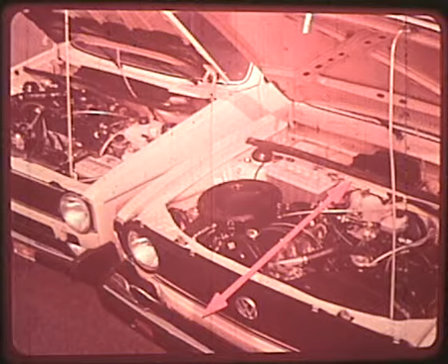The most obvious change from the Dasher and most other cars is the engine is mounted sideways. The conventional method of mounting inline and V-type engines with the crankshaft aligned fore and aft, as shown here in the Dasher, is not really necessary or important with front-wheel drive. The transverse Scirocco and Rabbit engine transmission arrangement for both manual and automatic transmission cars makes for a more efficient use of the engine compartment space and improved access to components.

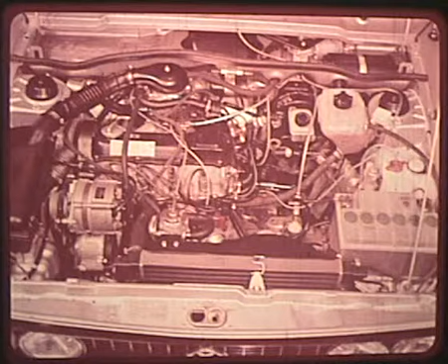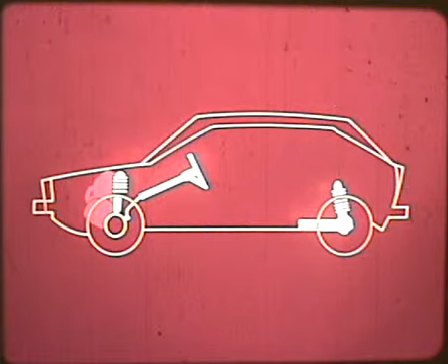It allows a shorter engine compartment than in the Dasher, and it means the transmission and drivetrain is also different from the Dasher, although the engine is the same. We'll come back to the engine compartment later, but first, let's get a more general idea of what we have in these two cars. The Scirocco was designed as a sporty car, while the Rabbit is more of a family car and can accommodate up to 5 people. Mechanically, both cars are practically identical. The differences are in the body styles and interior configurations.

The front bucket seats in both cars are in the Volkswagen tradition, designed by orthopedic experts to give solid comfort to driver and passenger. They are individually adjustable front to back, as is the angle of the backrest. The car is built for comfort, even luxury in driving.

The instrument panel, for instance, has been carefully designed so the quickest glance will give the driver the information he needs. The Scirocco dash features a full speedometer-sized tachometer in the sports car tradition, and a resettable odometer is included in the speedometer housing. A voltmeter and a quartz clock are included in the center console. On the Rabbit, the tachometer is replaced by a speedometer-sized quartz clock.

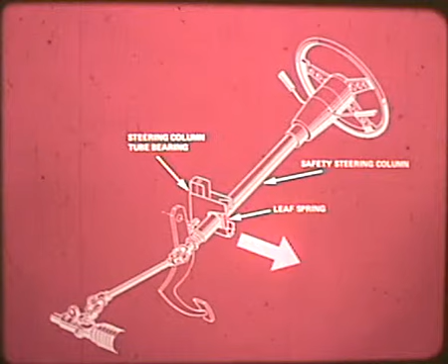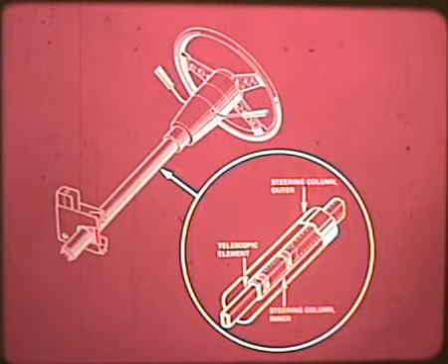Safety is built into these cars in many ways. Take the steering column. In case of a front impact in a car equipped with manual transmission, the leaf spring shown in red will give way and the column swings to the side. In automatic transmission cars, the steering column is additionally equipped with a telescoping element. After the column swings out to the side, it also telescopes.

The Scirocco and the standard Rabbit have a 3-point safety belt, but some of the Rabbits have an optional automatic seat belt. It is fastened at one end to the door so that when the door is closed, it covers the chest without a special hookup. This is Volkswagen's new passive restraint system. Again, on the Rabbit only, as part of the passive restraint system, a special knee bar prevents the front seat passenger or driver from sliding forward in case of front-end impact. This feature takes the place of the airbag, which some manufacturers offer as a high-cost option.

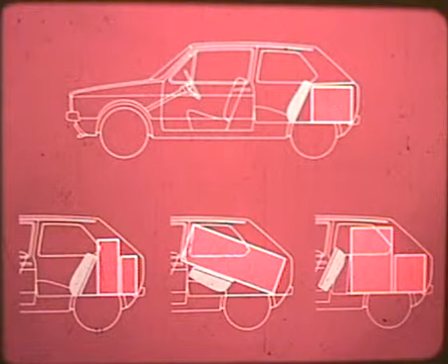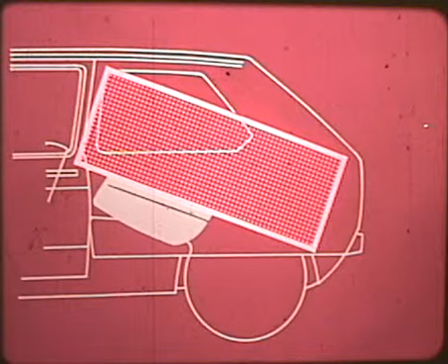The Rabbit luggage compartment deserves special attention. It is roomy to begin with and is expandable in several different ways, as these drawings show. With the rear seat in its normal position, there is as much room as many larger cars have, 12.4 cubic feet. The rear seat backrest can be folded forward over the rear seat cushion to allow large luggage to be carried. Even larger luggage can be carried by upending the seat cushion with the backrest folded forward.

So far, we've talked about the features of the new cars from the customer's viewpoint. One thing that no words or pictures can tell you is the excellent riding comfort, superb handling, and nimble response of both the Scirocco and Rabbit. These characteristics you have to experience yourself by driving the cars.

Now that we've had an overall view of the Rabbit and Scirocco, let's talk about how the cars were designed from start to finish with easy serviceability in mind. A case in point is that service intervals have been extended. Maintenance is required only every 15,000 miles, with an oil change every 5,000 miles. This means that the pre-delivery service and 1,000-mile checkup are more important than ever.

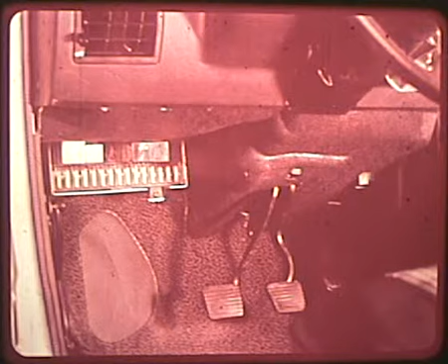Here are the main features that are new with the Scirocco and Rabbit. We said before that the electrical system was similar to the Dasher. However, the fuse and relay board is located under the dash to the left of the steering wheel. Fuses and relays are easily accessible for replacement.

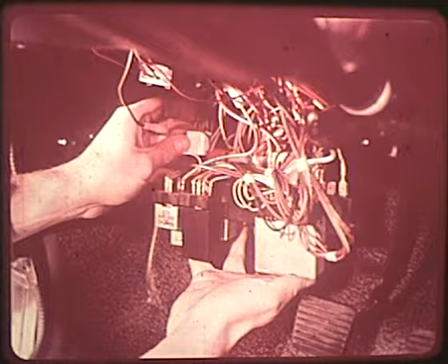The wiring harnesses terminate in plugs, which fit into the rear of the fuse board. Each plug is keyed so it cannot be inserted in the wrong socket. From the back of this board, with the help of the wiring diagram, it is a simple matter to trace many of the electrical circuits in the car.

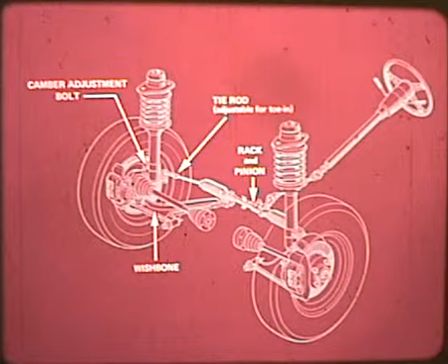The front suspension features McPherson strut and rack and pinion steering. Toe-in is adjusted on the right-hand tie rod only, and the suspension strut is bolted to the wheel bearing housing for easy replacement. To adjust camber, loosen both suspension strut bolts, then turn the upper attachment bolt, which is eccentric, until the required camber is obtained. Tighten nuts and check camber again to assure it's right. If necessary, readjust.

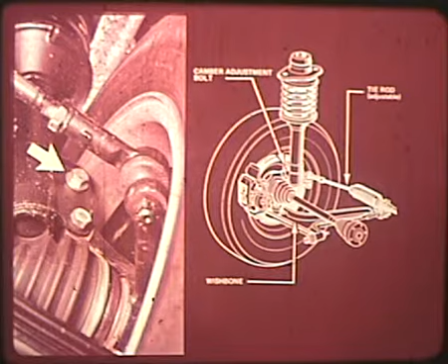The rear suspension is really different. It's called an independent stabilizer axle. Its main elements are a steel torsion beam, indicated by the green arrow, and welded-on trailing arms. This is a surprisingly simple but very effective independent wheel suspension system. When only one wheel hits a bump, the torsion bar can twist as much as necessary to absorb the deflection, while the other wheel stays firmly on the ground. The suspension struts are integral units, combining coil springs and shock absorbers, and are bolted to the body.

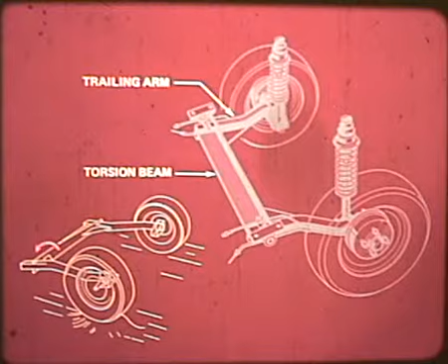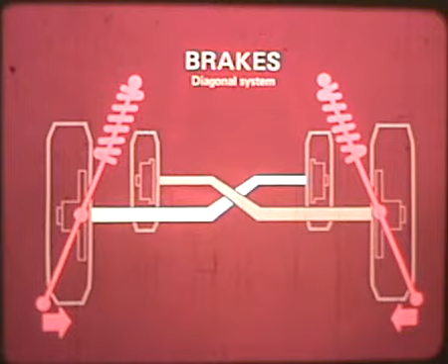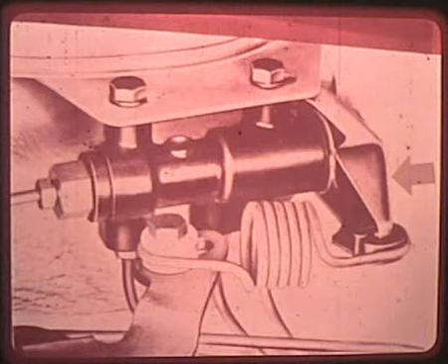As in the Dasher, the braking system is dual diagonal. Right front and left rear are on one system, and the other two are on another system. If one system fails, the car can be brought to a straight line stop with the help of its negative roll radius. Drum brake adjustment is made the same as on all other Volkswagens. On cars equipped with brake pressure regulators, refer to the repair manual for procedure to relieve hydraulic pressure if the rear wheels do not turn freely with shoes backed off.

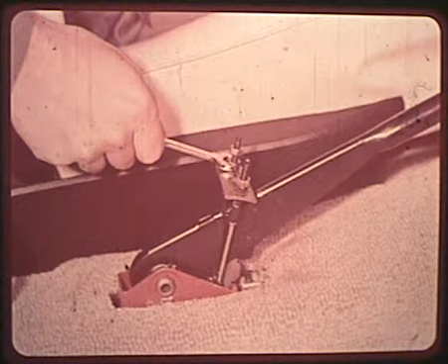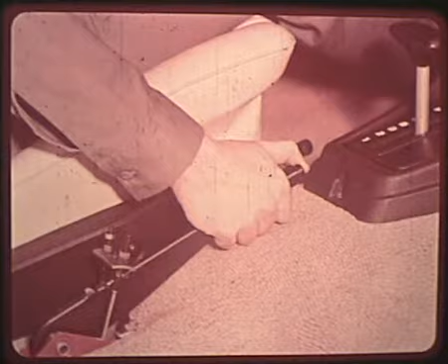The parking brake is adjusted from inside the car. Each rear wheel is adjusted separately. First, loosen the lock nut on one parking brake cable and pull the lever to the second tooth. Then, tighten the adjusting nut until the affected rear wheel can hardly be turned by hand. Release the brake lever and make sure the wheel can turn freely before tightening the lock nut. Repeat the process to adjust the other rear wheel.

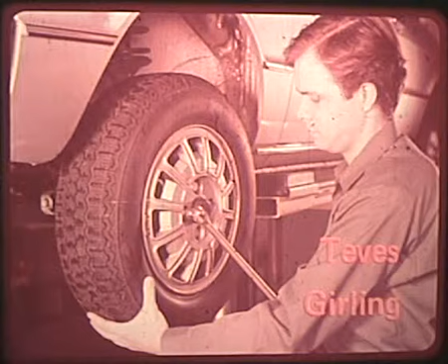Of course, the front wheels have disc brakes, but the calipers could be either of two designs, Teves or Girling. Either way, they have a unique wear signal that should appeal to customer and servicemen alike. Here's how it works. There is a 2mm high spot on the disc, as shown in yellow, which does not contact the pads until they are worn to the point where they need replacing. When the inside part of the pad contacts the high spot, rotation of the wheel will cause pulsating action, which is transmitted to the brake pedal. The driver can feel this bumping action when his foot is on the brake pedal.

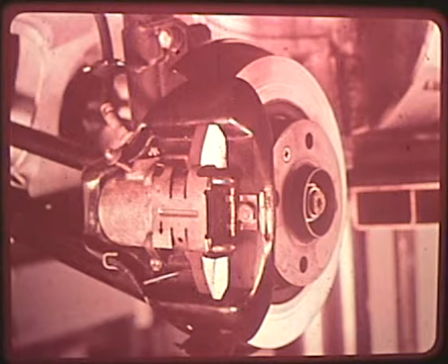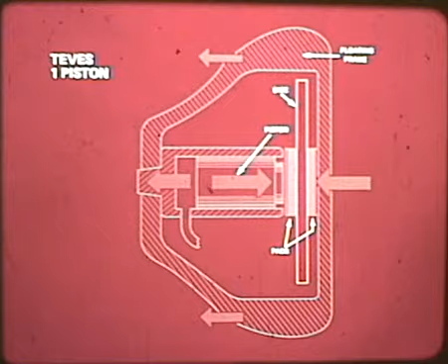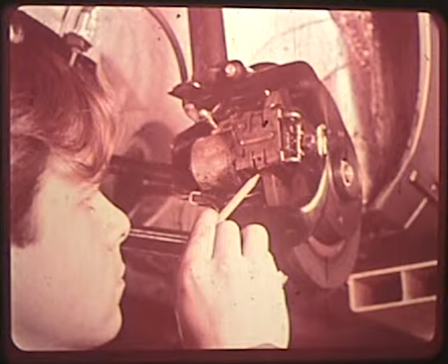As we mentioned, some Rabbits and Sciroccos will be equipped with the new Girling caliper. So, we'll show how these calipers operate and how the pads are changed. First of all, most floating calipers are of the single piston design. In the Girling system, two pistons are used. One to apply pressure to one pad, while the other applies pressure to the floating frame or yoke, which in turn forces the opposite pad against the disc. You can check for wear of the pads visually, but this should not be necessary because the driver will be aware of the need for brake pad replacement if the brake pedal pulsates when the brakes are applied.

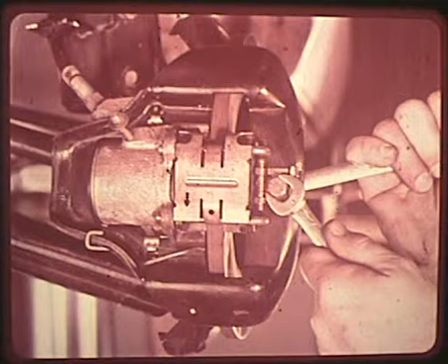Should you have to replace the pads, remove the wheel, then take out the bolt that holds the retaining pin assembly. With pliers, pull out the pin assembly. The spreader spring will fall off when this is done. Now, replace the pads. After reinstalling the pin assembly and retaining bolt, replace the spreader spring with the arrow down. Then put the wheel back on and you're done.

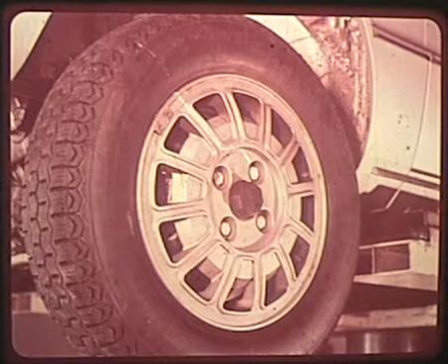With front wheel drive, you don't have to adjust front wheel bearings. But rear wheel bearings can and should be adjusted whenever necessary. Wheel bearing clearance is correct when the thrust washer can be moved with only a slight pressure on the screwdriver. After adjusting, secure the assembly with the lock nut and a new cotter pin.

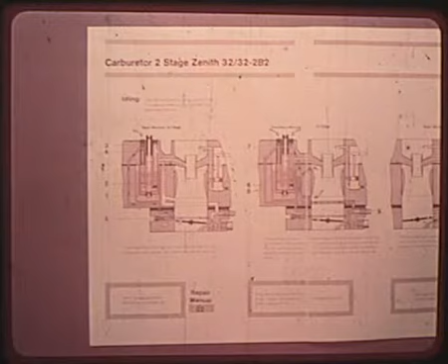As mentioned earlier, the engine in the Rabbit and Scirocco is the same as the Dasher, 1500 cc, developing 70 horsepower at 5,800 RPM. Bore, stroke, and compression ratio are all identical. Featured on the engine is a new two-stage Zenith carburetor. Its operation is fully explained in the introductory service booklet.

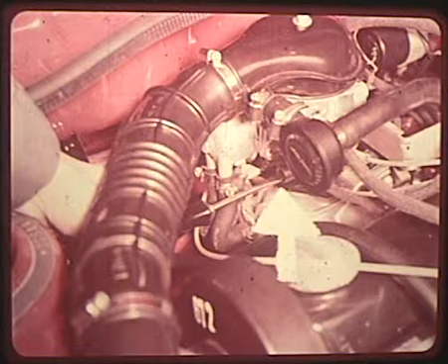Normally, only two carburetor adjustments are necessary. The first adjustment is idle speed, set to between 900 and 1,000 RPM with the idle adjusting screw indicated by the arrow. Turning it to the left speeds up the engine, and to the right slows the engine down.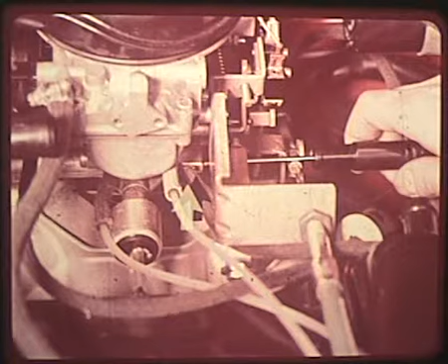Next, CO is adjusted by inserting the probe ahead of the catalytic converter by removing the cap on the EGR filter housing. Then, disconnect the air pump and adjust the carburetor mixture screw, as shown, until a CO value of 1.5 to 2.5% is obtained.

This brings up the subject of emission controls. Full details of the devices on these two cars will be found in the booklet 1975 Fuel and Emission Devices, but we'll mention them briefly. We basically have three devices to control hydrocarbon and CO emissions and exhaust gas recirculation to reduce emissions of oxides of nitrogen. Let's look first at secondary air injection.

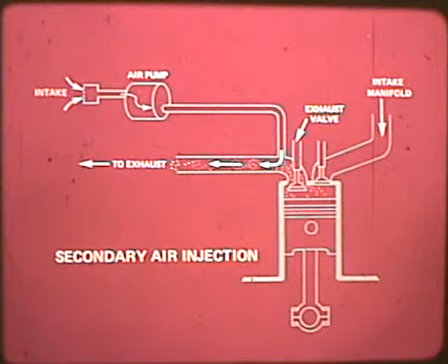Emissions of hydrocarbons and carbon monoxide are reduced by using an air pump by which fresh air is pumped into the exhaust manifold. The extra oxygen in the air allows the escaping hydrocarbons to continue burning, thus reducing their content at the tailpipe. With exhaust gas recirculation, some of the exhaust is fed back into the intake manifold. As a result, combustion chamber temperatures are lowered, thereby reducing the formation of oxides of nitrogen.

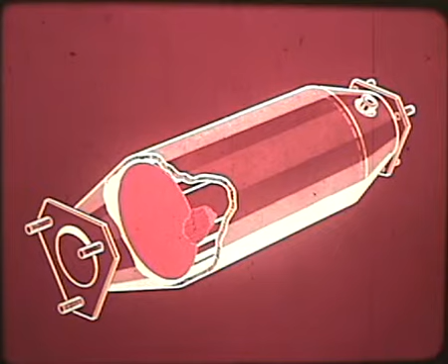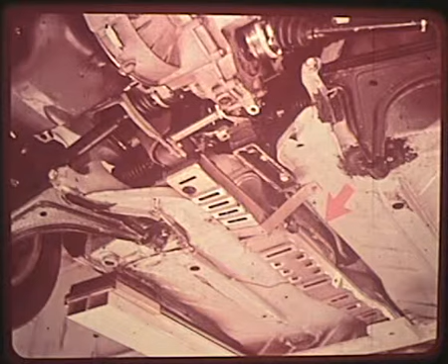The catalytic converter takes the HC and CO-laden exhaust and, in effect, cleans it up after it leaves the engine. The catalyst inside the converter triggers a chemical reaction which converts the undesired emission to harmless water vapor and carbon dioxide. For the catalytic converter to perform its function, it must operate at a very high inside temperature, over 1600 degrees Fahrenheit, so it is insulated from above and below.

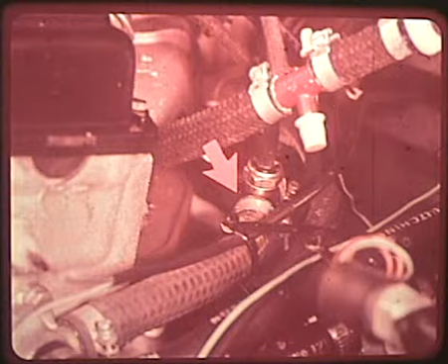To bring the converter into operation as quickly as possible, a temperature-controlled ignition advance valve remains closed when the coolant temperature is below 136 degrees Fahrenheit. This results in retarded ignition timing. When the temperature exceeds 136 degrees, the valve opens, allowing the ignition to advance.

As you know, cars equipped with catalytic converters must use unleaded fuel. Only the special nozzle on the unleaded fuel pump will fit the filler opening on these cars. If as little as 2 tankfuls of leaded fuel is used, the catalytic converter's effectiveness will be reduced by at least 75%. Here we see a close-up of the catalytic converter with the lower heat shield removed. When replacement is necessary, the entire converter is replaced.

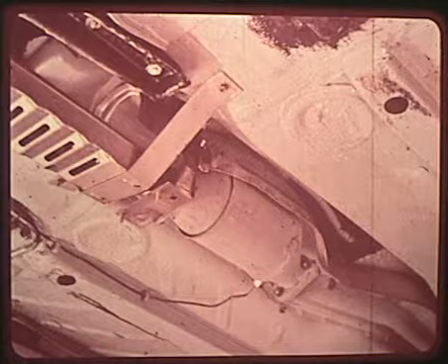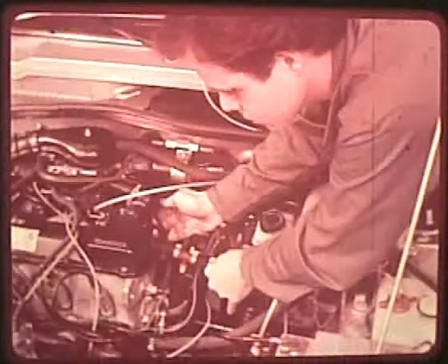Earlier, you may have noticed the 2 warning lights on the dash. The one for exhaust gas recirculation, marked EGR, will light up after 15,000 miles, indicating a need for servicing. This includes visually inspecting the EGR system for leaks or damage, and then resetting the elapsed mileage odometer so that the EGR light goes off and the mechanism begins counting mileage again from 0.

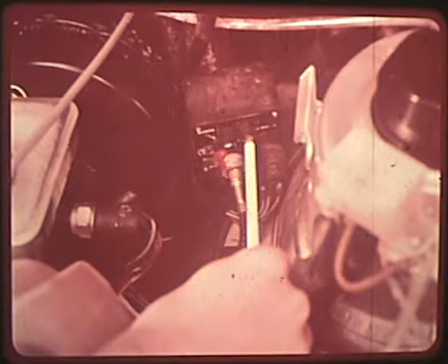The CAT light button is reset in the same manner after the catalytic converter has been replaced. The CAT light will go on at 30,000 miles, indicating it is time to replace the catalytic converter. Should this light flash on and off at any time, it means the converter is overheating and the cause must be determined.

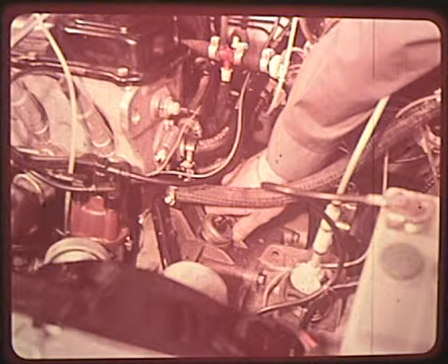Timing the Rabbit and Scirocco is slightly different from the Dasher. First, on manual transmission cars, this plug must be removed to reveal the timing mark on the flywheel. As usual, attach the dwell meter before timing, and be sure the dwell angle is between 44 and 50 degrees. Then, with the engine at normal operating temperature and running at the correct speed, aim the timing light into the hole and rotate the distributor until the timing mark appears opposite the notch.

Don't be confused by the 2 TDC sensor indicators, the transmission removal alignment lug and the 0 or top dead center mark. This V-groove in the flywheel is the only mark you need be concerned with when timing the engine.

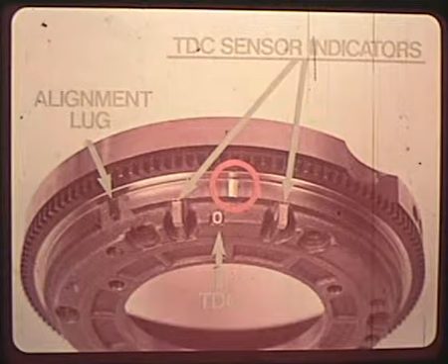On automatic transmission cars, there is no hole plug to be removed. The scribe line on the drive plate, which is 3 degrees after the top dead center mark, must be aligned with the stationary pointer on the bell housing, as shown here. Both the top dead center mark and timing mark will be visible in the hole when timing is correct.

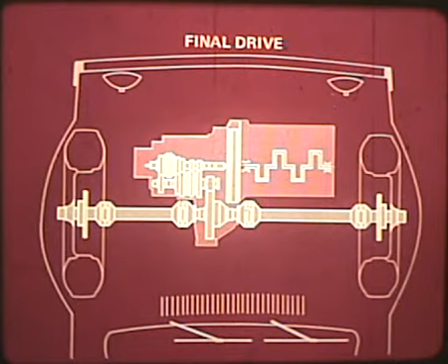The final drive is all new, made necessary because of the transverse mounting of the engine. This drawing of the final drive assembly illustrates how sensible it is to mount the engine sideways. It means that the engine crankshaft and transmission turn parallel to the axle and wheels. Thus, it simplifies the transmittal of power from the engine through the drivetrain to the wheels. When the engine is removed, the transmission should come with it.

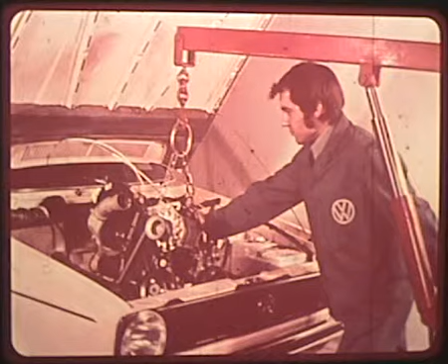However, the transmission can be removed from underneath without the engine. Adjustment for clutch pedal free play is quite simple. Loosen the lock nut at the end of the clutch cable on the top of the transmission. Then turn the plastic ring right or left until the proper amount of free play is felt at the clutch pedal. Then retighten the lock nut.

The automatic transmission has also been simplified. Shifting is controlled mechanically by accelerator pressure rather than by vacuum as in the past. This means that accurate adjustment of accelerator cable linkage is of utmost importance for proper operation of the transmission.

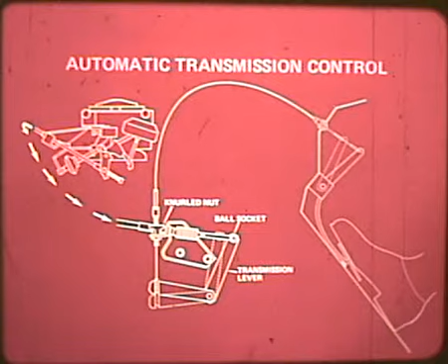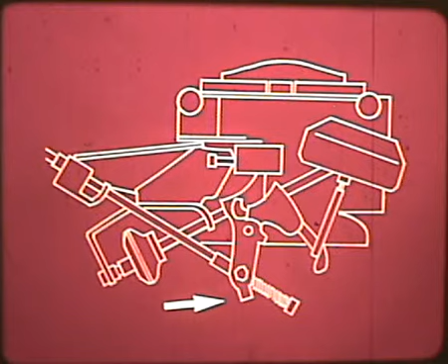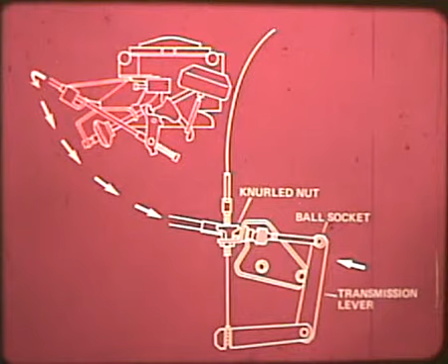To check for proper accelerator cable adjustment, move the throttle lever on the carburetor to the fully closed position and be sure the choke is off. Remove the ball socket on the cable from the ball stud on the transmission lever. With the transmission lever held firmly to the left, it should be possible to press the ball socket onto the stud without tensioning the cable. If adjustment is necessary, proceed as follows.

With ball socket in place on its stud, loosen the nuts on the carburetor bracket that hold the accelerator cable in position. Hold the transmission lever toward the left. Then adjust the tension with the rear nut on the carburetor bracket until there is no play in the cable. Lock the cable in this position with the front nut on the bracket.

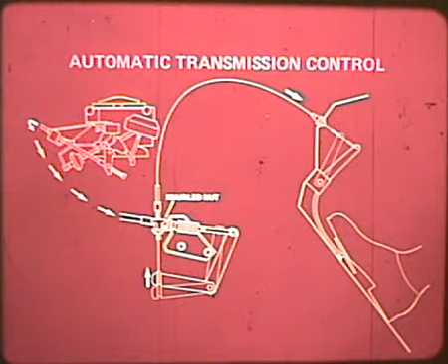Finally, depress the accelerator pedal to the floorboard and adjust the pedal cable at the knurled plastic nut until there is no play in the cable. This assures that transmission kickdown will take place properly.

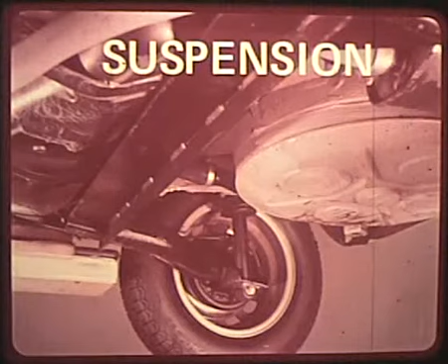We've talked about some of the highlights of repair procedures on the Rabbit and Scirocco, starting with the extended maintenance intervals. The suspension systems, including camber and toe-in adjustments. We covered the braking system, front wheel pad replacement, rear drum adjustment, as well as wheel bearing adjustment.

The engine with its efficient transverse mounting and the new Zenith carburetor and its adjustments, and ignition timing as well. And finally, the manual transmission, including clutch adjustment and the automatic transmission with its very important linkage adjustment.

At several points in this film, it was suggested that you refer to various publications for more detailed information. They are not textbooks, because it is assumed that you are familiar with basic automotive repair procedures. The most important is the new Volkswagen repair manual for Rabbit Type 17 and Scirocco Type 53.

This manual should tell you most everything you need to know to replace, install, or adjust a component on the car. The manual is a brand new design that makes it easy for a mechanic to find what he's looking for in a hurry. First, the manual is organized into repair groups: general, engine, clutch and transmission, suspension, brakes and steering, heater and ventilation, and electrical. Most all information on assembly, disassembly, repairs, and adjustments will be found in its own section. This is page 3.

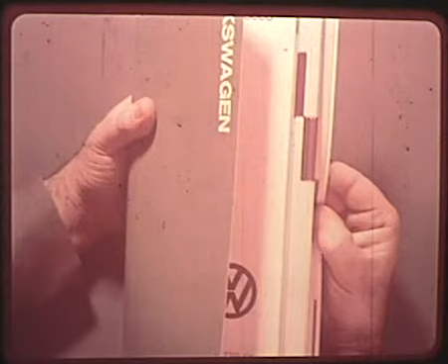Incidentally, these repair group identification numbers correspond to the first 2 digits of the repair time and warranty code found on product information circulars and in the suggested repair time book. Let's say you wanted to check the details on replacing a ball joint. In the suspension, brakes, and steering group, an arrow points to a number of pages that are black on the edges. This is called a thumb index, and your subject will be covered somewhere in these pages.

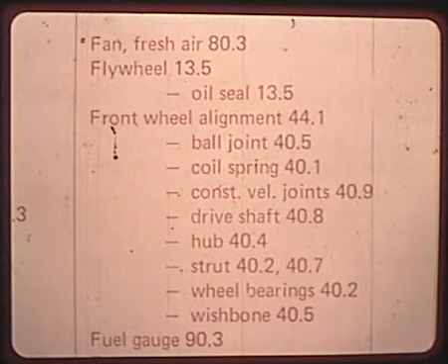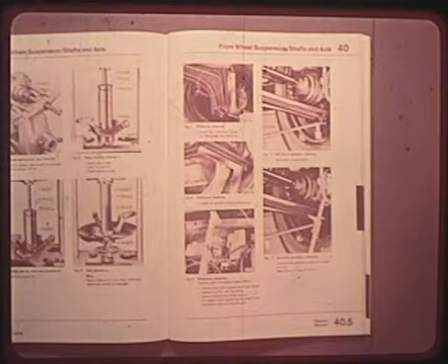But you might prefer to take one more step and turn to pages 4 and 5, where individual components are listed in alphabetical order. Under front wheel alignment, it says ball joint will be found on page 40.5. Turning to this page, we find detailed instructions on checking the wishbone and the ball joint and removal of the wishbone. On the following page, a clear illustration and detailed instructions are given for drilling out the rivets, enlarging the holes, and installing the new ball joint with 8mm bolts.

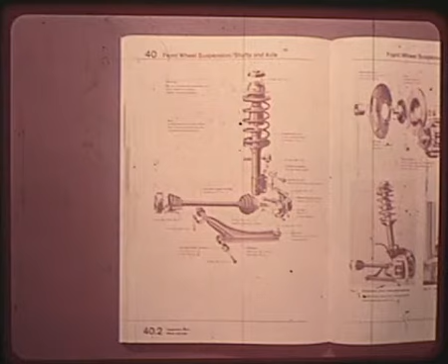If you need to see what the entire assembly looks like, an exploded view will be found at the beginning of the front wheel suspension section. This is true of each subject listed on the Repair Group's page. When a special tool is needed to make a proper repair, it is identified with the tool number, especially if it is new. Under the general section at the front of the book will be found such information as where to find the chassis number.

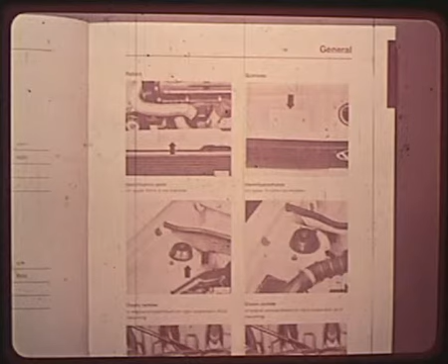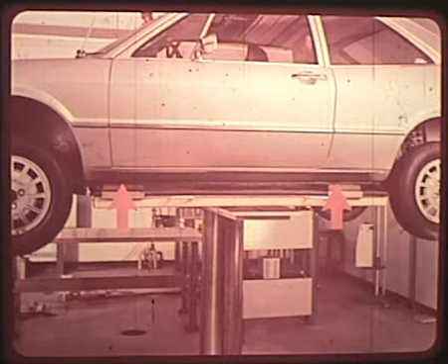Of particular importance in this grouping are the lifting instructions. Both Scirocco and Rabbit have a triangular mark on the side member for both the front and rear lifting locations. The hoist pads must be positioned under the welded flange at these points, as shown here.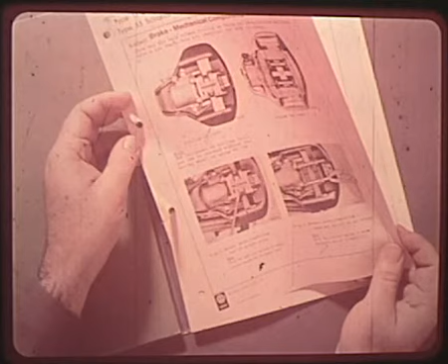From time to time, supplements to the manual are issued when information is updated. When this happens, a sticker with the supplement number is attached to the page affected, and the supplement bulletin is bound into the back of the book cover. Then, anytime you see a red sticker on a page, be sure to check for the latest information.

We've had a quick look at the highlights of the Scirocco and Rabbit. From a technical standpoint, these new Volkswagens are practically identical, as a careful study of the manual and these brochures will show. The Scirocco and Rabbit are brand new and exciting cars. They incorporate revolutionary advances never before built into production cars. They are the new generation of Volkswagens.